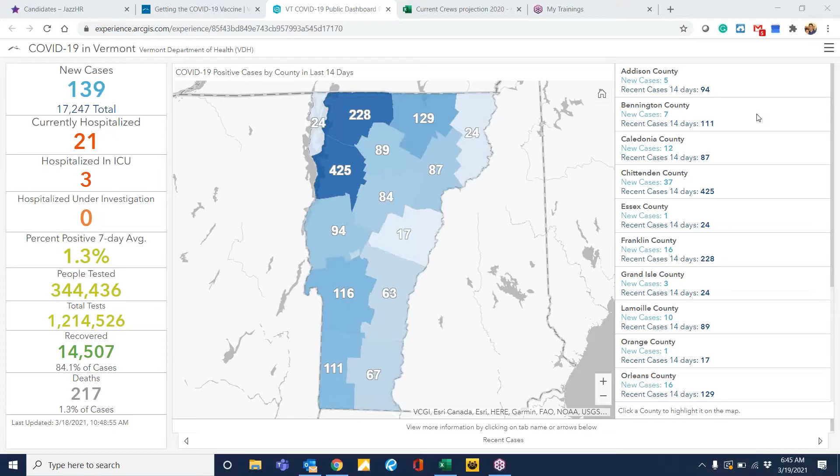COVID update: we're at 1.3% 7-day average, which is the direction we're going. Each week it's going down and down and down, so that's good news. We're anticipating a press conference from Governor Phil Scott today to hopefully give us an idea of what April is going to look like for us at ECI. We're expecting some good positive news as we get into spring 2021.

Vaccine rollout, everything's the same. Again, we're supposed to get information today regarding additional phases by occupation and age groups. Nothing new to report. Let's continue to follow best practices, we're doing an excellent job with our communication. Health and safety is here for any COVID related issues, just give us a call and we'll develop a plan and execute it.

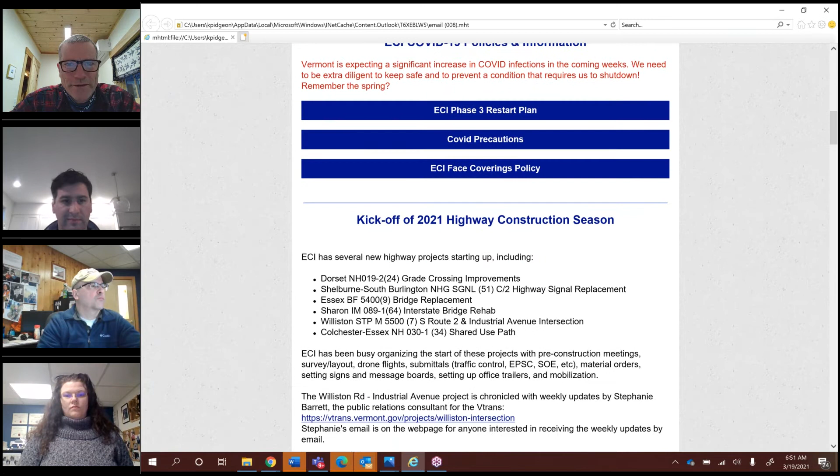For the project this week, we're highlighting the kickoff of the 2021 highway construction season. Just want to note that we have several new highway projects starting up, including the Dorset Grade Crossing Improvement Project, the Shelburne South Burlington Highway Signal Replacement, the Essex Bridge Replacement on Route 17, the Sharon I-89 interstate bridge rehab project, the Williston STP Industrial Avenue Route 2 intersection widening, improvements and resignalization, and also the Colchester Essex shared use path.

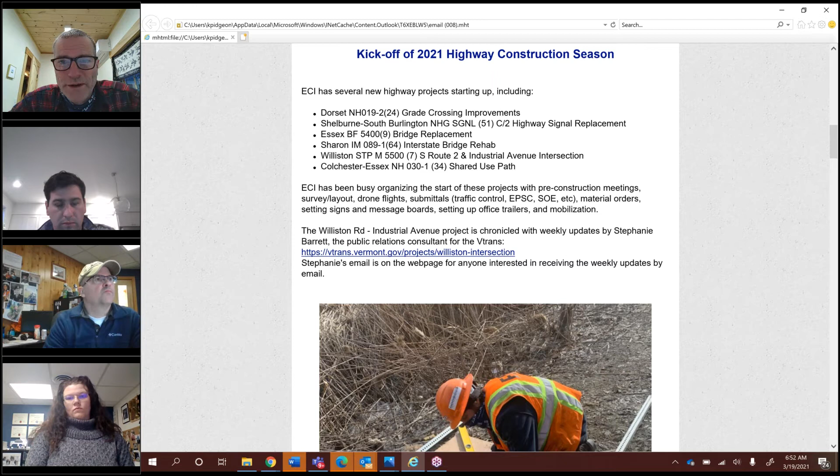ECI has been busy organizing the start of these projects with lots of pre-construction meetings, official meetings with the state, with the owners and other stakeholders, and within ourselves to get organized. We've done a lot of survey and layout, drone flights, prepared submittals like traffic control, EPSC, support of excavation, and other things. There's material orders that have been done, setting up signs and message boards, office trailers, and mobilization of equipment and materials.

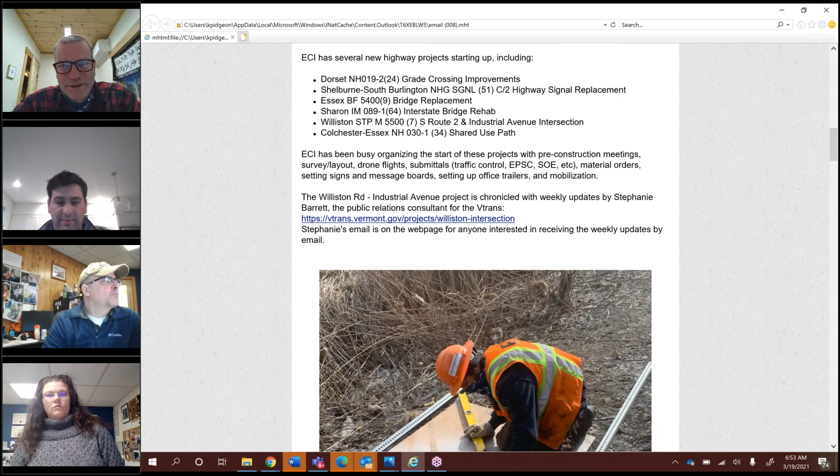The Williston Road Industrial Ave project is also chronicled weekly with updates by Stephanie Barrett, the public relations consultant for VTrans, and there's a link on the VTrans website. On that web page, you can sign up for a weekly update by email. I received that and passed it along to a couple people, giving updates on what's going to happen on that intersection, which impacts us too for traffic.

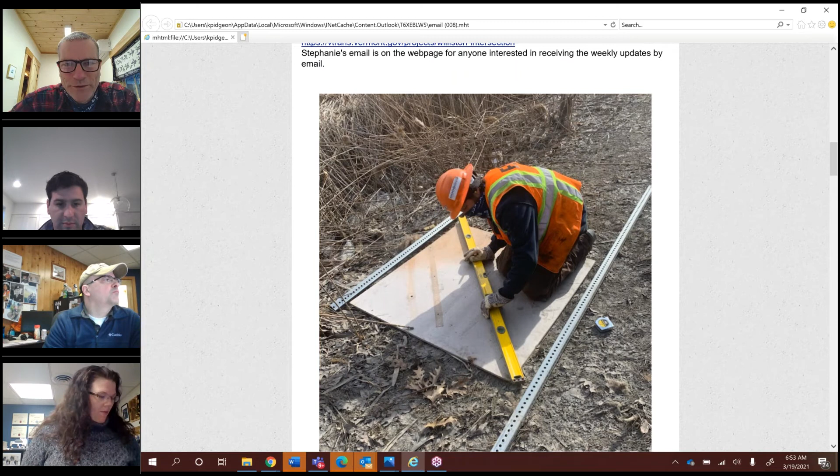But it's all a lot of night work. A lot of the impact to traffic is at night, so it should be seamless, hopefully, to most of the traveling public. And here we are getting some signs going up on that project.

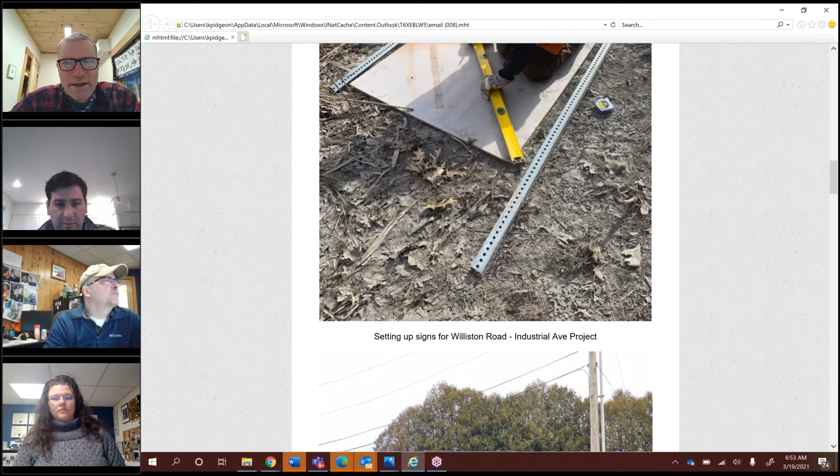Getting the attachments done to the post. This is the sign and the Alberta message board. Alberta took the picture of this yesterday and the actual wording didn't show up, but there is a message there. This is across from Engineers Drive, and a sign that went up there.

A lot of side streets are impacted here. There's a picture from across the road from the office, and I looked at that tree and I'm thinking, wow, how'd you like to have to split that up? That would be a chore, just sawing it and bucking it up.

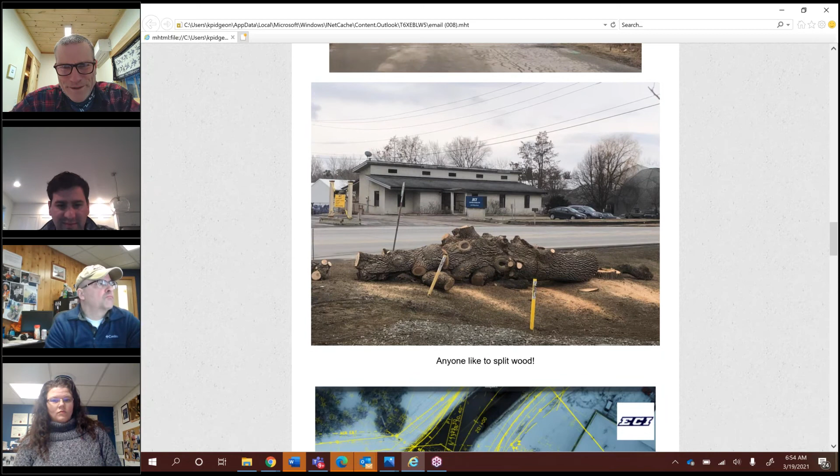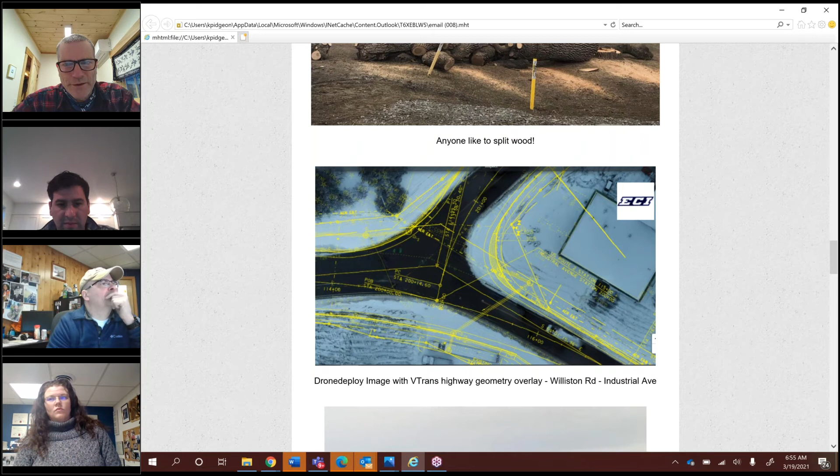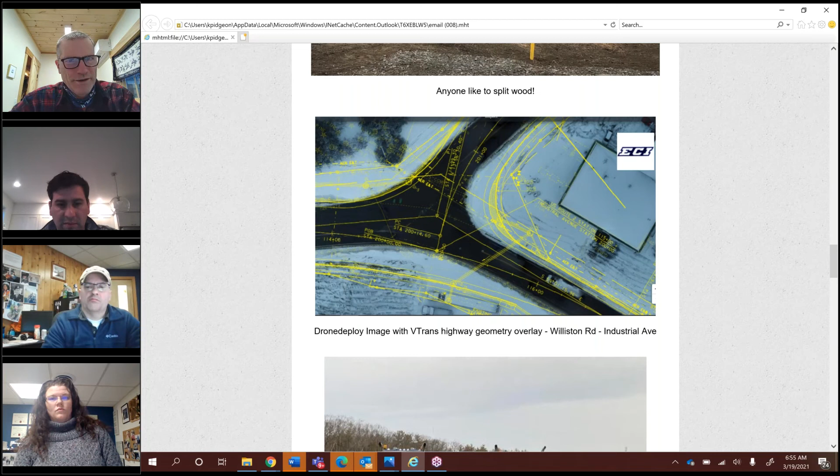Here's a drone image taken by our system called Drone Deploy, with the VTrans highway geometry from their drawings overlaid on top of the image, of the Industrial Ave and Williston Road intersection. Drone Deploy also has a three-dimensional surface model with elevations and coordinates so everything can be tied together. We can use that model for GPS control, but it also gives a great visual of where the improvements go. Prior to this, you had to go to three different VTrans drawings to understand where the existing road was versus the changes, but here we can bring it all together.

This week we are also moving 324 Jersey barriers from York, Maine to the Sharon project. We had 3 trucks rolling all week long, loaded with Jersey barriers, making 2 trips a day. We bought the Jersey barriers from a project in Maine, hauled them back, and dropped them off at our staging area.

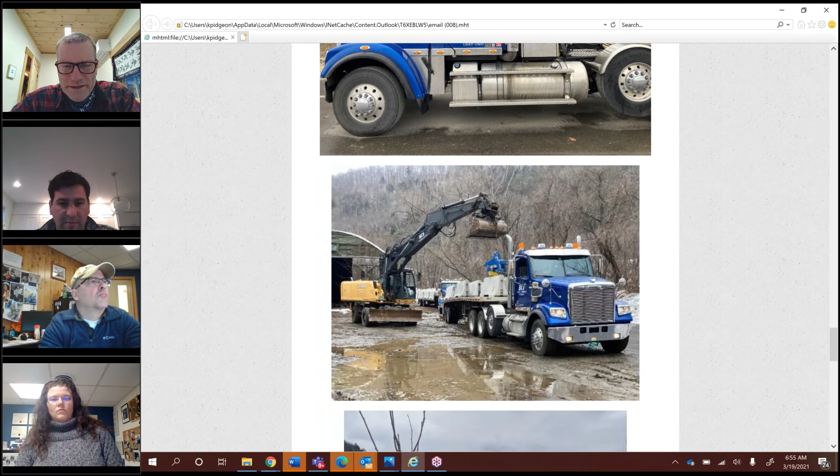There's a picture of the Sharon bridges. These are not small, insignificant bridges. We're rehabbing the deck and a little bit of the structure, and then there's a painting subcontractor that'll be working for us doing the de-leading and repainting of all the girders, as well as setting up job trailers at that site.

In addition to these projects, ECI is also subcontracted on several other projects to J. Hutchins, Pike, and maybe a few others for rail crossing and signal projects. So we've got a busy spring, summer, and fall coming up. Some of these jobs are 2-season jobs, like the Sharon project and the Williston Road Industrial Ave project.

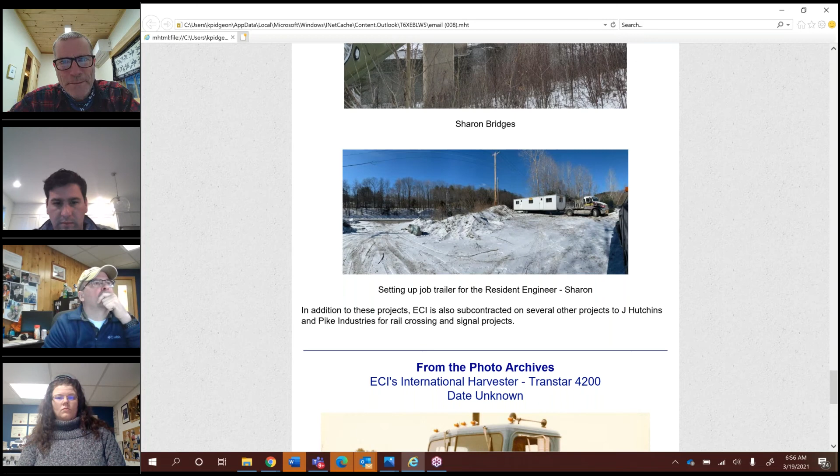From the archives here, we have an old picture. I believe that's Donnie Jakes, though it's really hard to tell who's behind the window there - he would have been the driver. This is who knows what year, probably late 70s or early 80s. It's an old International Harvester, an IH - you can see the IH on the doorway there. It's a 4200. I looked into it a little bit; I think those were made from the mid to early 70s up to the mid 80s. I can't identify the exact year or where it was taken, but that clearly is Engineers Construction.